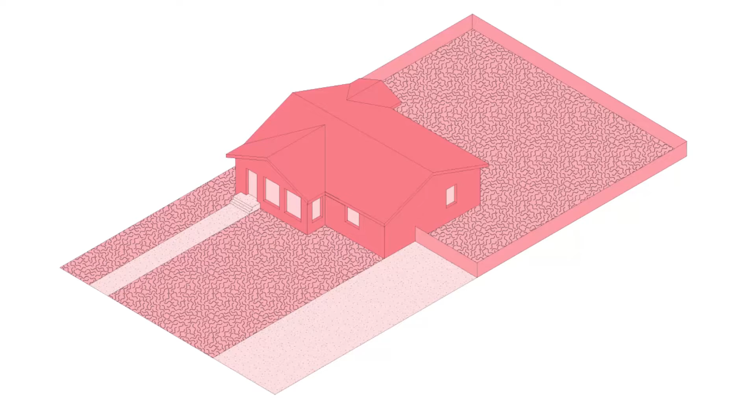California is in the midst of a severe housing shortage. Southern California alone has an estimated housing deficit of 800,000 units. To address this, California's legislature passed State Assembly Bill 68, which allows all single-family residences to add accessory dwelling units, known as ADUs, to the property. These units typically reside in the rear of the lot and can be as large as 1,200 square feet. With this additional dwelling, the backyard is transformed from private domain to semi-public shared space.

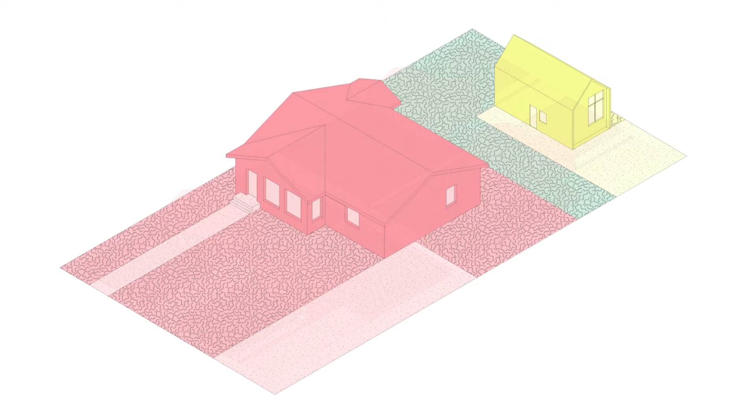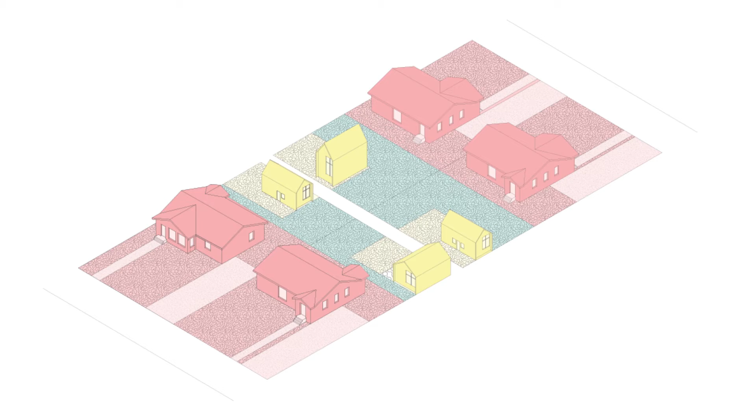Integral to our design approach is an understanding of a typical suburban community in Los Angeles, where lots are adjacent to each other and often separated by a fence. Eschewing the age-old adage that good fences make good neighbors, we intend to tear down barriers and create micro-communities. The configuration of these communities can take many forms, with alternative layouts producing alternative sorts of social interaction.

Guiding these micro-communities is the idea of participatory ownership, wherein maintaining the semi-public shared space rests on both homeowners and tenants. Pool House reaches out to homeowners and offers to build them a secondary unit, putting up all the cost and handling the architecture, construction, and leasing. In return, Pool House receives a 10-year lease on the ADU, allowing it to sublet the unit for a profit. During that lease, Pool House makes monthly payments to homeowners for 10% of collected revenue. At the end of the 10-year lease, the homeowner keeps the secondary unit and can choose whether to retain Pool House as a property manager.

Reimagining the typical Los Angeles housing block.

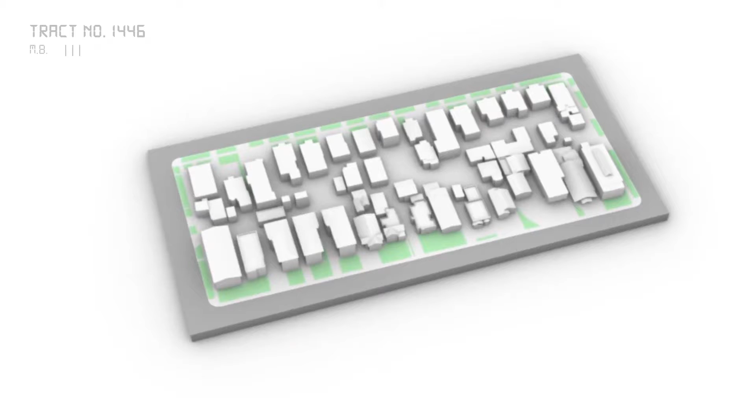Los Angeles, for all of its architectural variety, still retains certain uniform qualities—notably, the city block. In West Adams, the typical block is comprised of an array of homes that abut one another on the sides and rear of the lot, otherwise separated by a two-way road. Tract 1446 is one such typical block, and will serve as the basis for the forthcoming speculation and proposal.

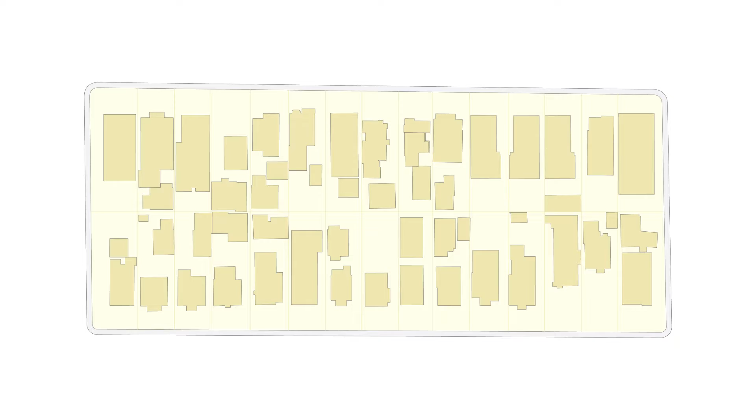By overlaying the building code distilled by Assembly Bill 68, we can begin to understand the potential for the individual lot, clusters of lots, and the block at large. We start by identifying the existing non-primary structures, mostly detached garages constructed in the 1950s. Imagining a clean slate, we apply an ADU setback analysis of 10 feet from any existing structures and 4 feet from the sides and rear of the lot, yielding 27,000 square feet of developable land and an additional 29,000 square feet devoted to a new public thoroughfare.

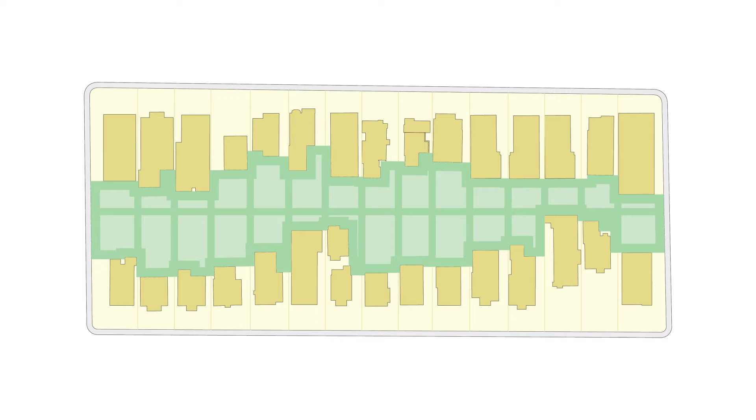The result is the inversion of the typical city block, such that community life is centered along what had been the rear of the lot.

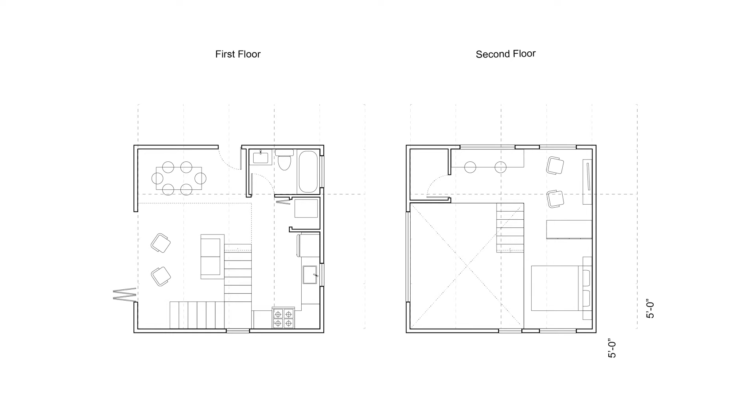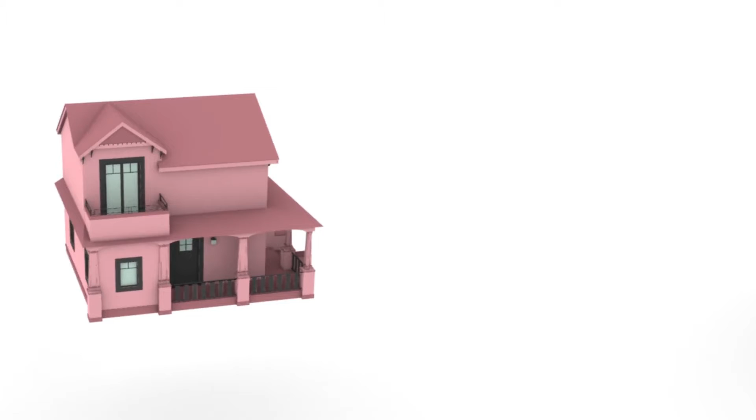Conscious of Los Angeles' eclectic housing aesthetics, this proposal studies and reinterprets many of the city's iconic styles, modified for affordability and rapid production. Along with 5 unique floor plans, ranging from 1-bed, 1-bath single units to 2-bed, 1-bath adjoined townhouses, this proposal reimagines 5 specific styles: International, Craftsman, Storybook, Colonial,

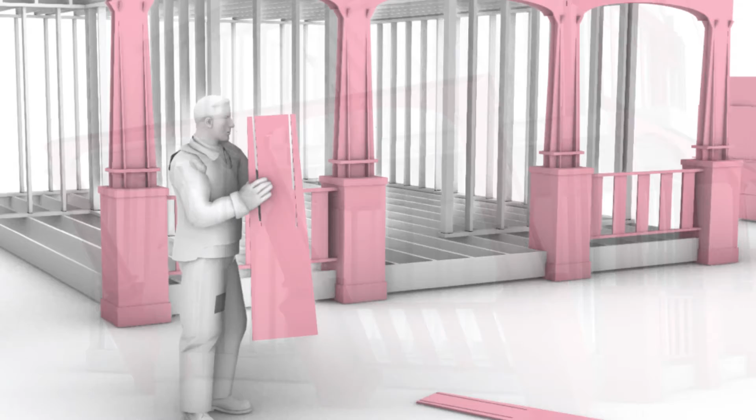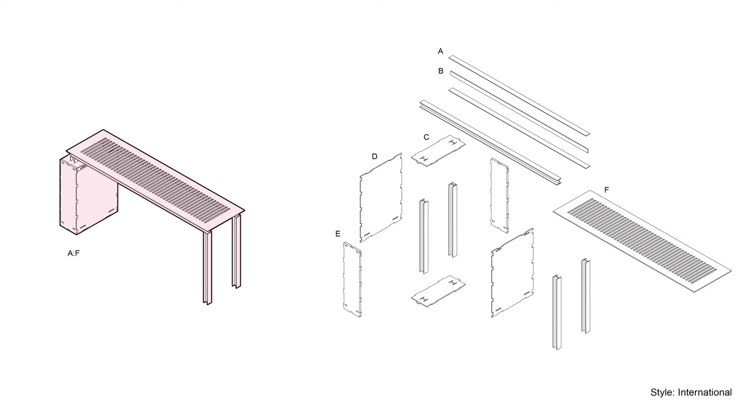and Spanish Revival. A specific element from each housing style is adapted to be generated from standard structural plywood that can be rapidly produced using CNC technology. Since these elements are formed from 2-dimensional cut paths and joined by interlocking slots, the result is not a one-to-one replication of existing styles, but an approximation that signals the past while broadcasting the future—embracing a new sort of pixelated historicism.

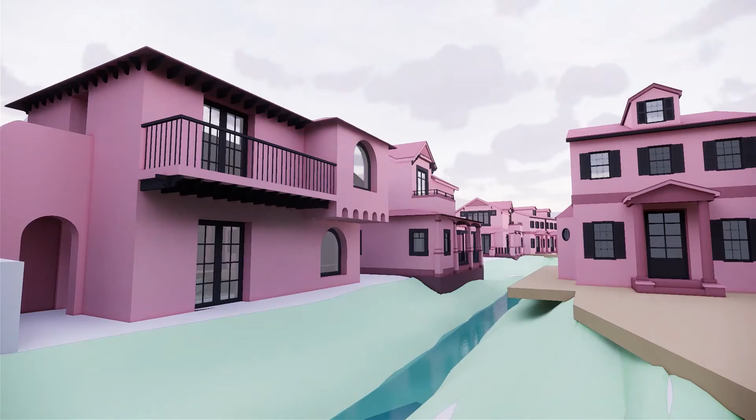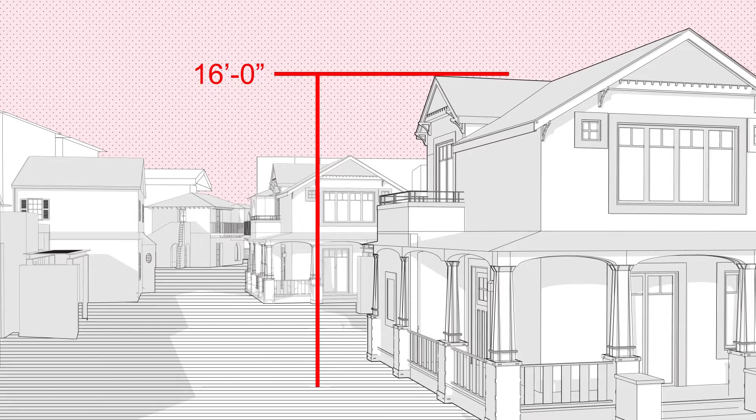With the statutory height limit of 16 feet for 2 or more units on a lot, our strategy deploys elevational changes to provide adequate overhead space on each floor. By creating a 4-foot depression in the ground, we subvert the height limit to allow for comfortable 20-foot, 2-story dwellings.

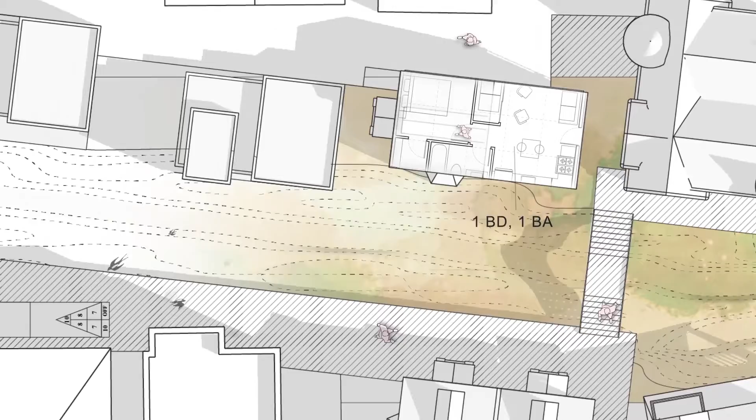Additionally, we leverage this depression in the ground as part of a larger landscape and irrigation scheme that tethers together these otherwise discrete units. The elevation change is treated as a native plant rain garden, a natural means of removing pollutants from rain runoff and providing new habitat for local flora and fauna.

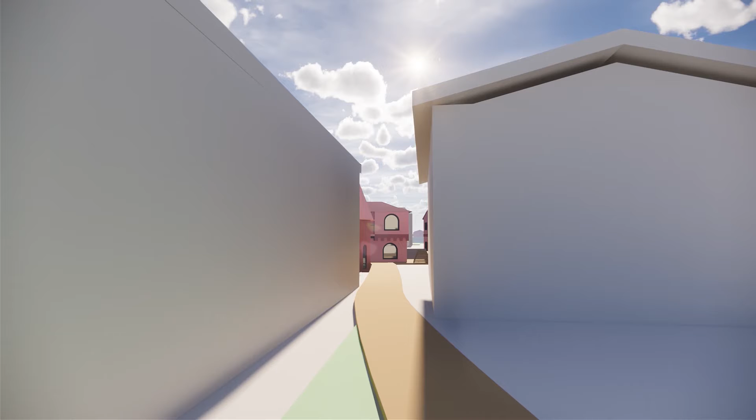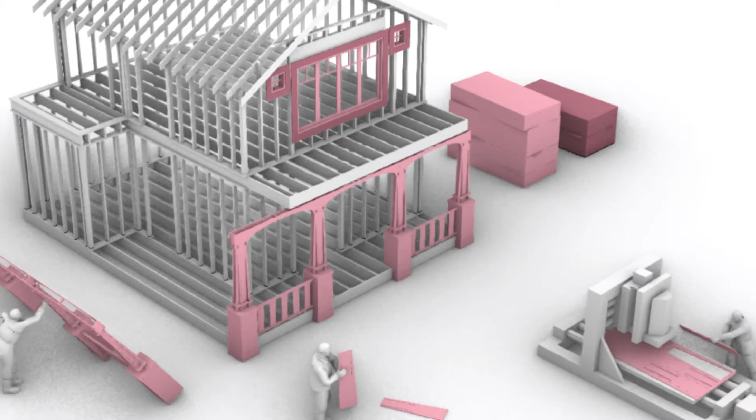The result of these actions is the production of a new community paradigm nestled within an old one. New housing stock gives way to more affordable prices, and smaller units facilitate the integration of different socioeconomic backgrounds. Rapid prototyping brings construction costs down while preserving the character of Los Angeles.

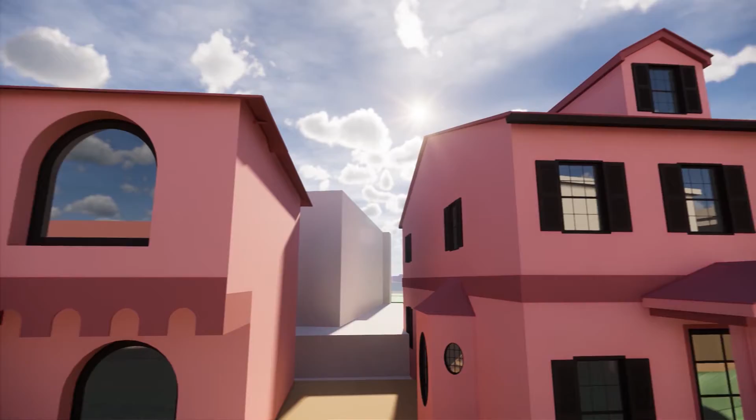In conjunction, these speculations collide to produce a more equitable and sustainable vision of LA, achievable within every typical housing block.

Pool House, the Catalog 2020. The catalog creates a product for living. The catalog addresses the pool house block, yard, alley, house, and components.

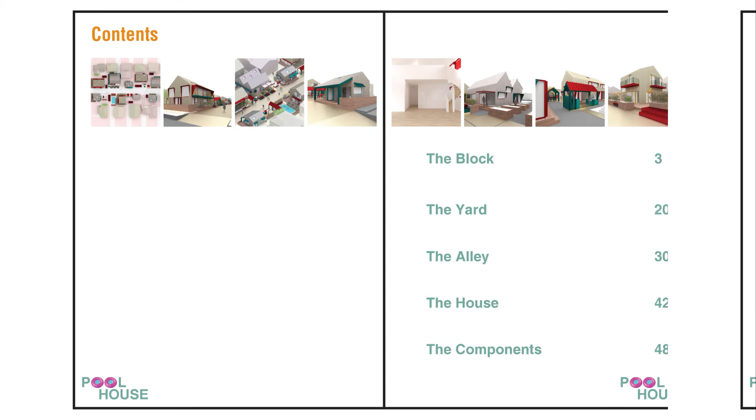The back house aims to address an increasing idea surrounding the live-work house. The Pool House catalog leverages architectural components to produce dynamic interaction between front and back houses throughout the neighborhood. Through participatory ownership, Pool House will facilitate a system of micro-landscapes to support this community of live-work housing.

The Block. Located in the southwest corner of West Adams, the block is near the Expo line. This investigation examines the city block with an alley.

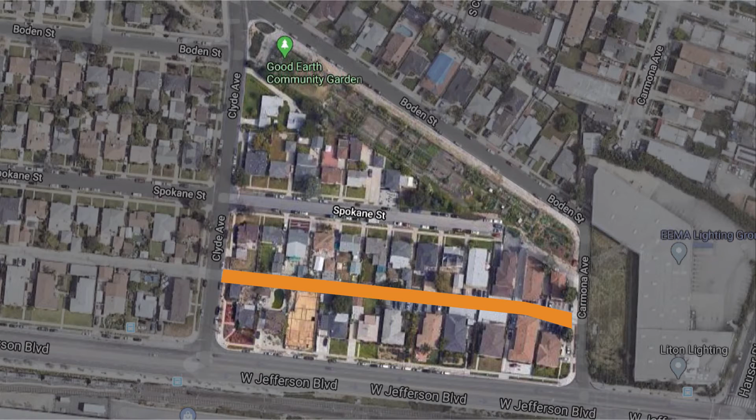Pool House will start as one house and phase into a network of backyard communal spaces that superimpose a grid of houses along the alley, creating a new frontage of pedestrian movement. The project works on two scales simultaneously, a city scale and a domestic scale.

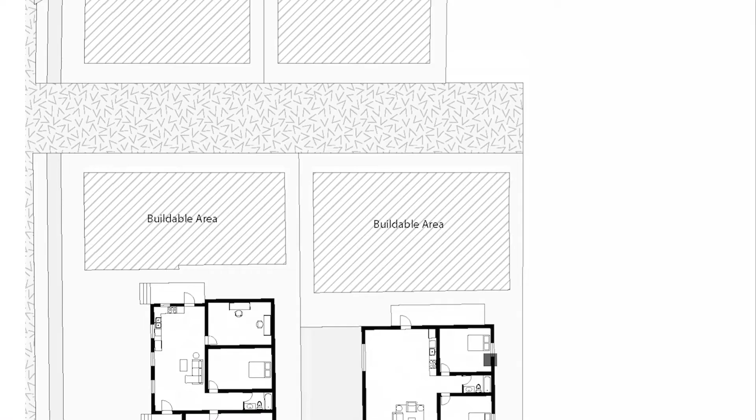The alley is activated by utilizing the 4-foot setback as parklets. Pool House sets up a network of micro-landscapes to create a harmonious relationship between neighbors.

The Pool House yard and alley break shared outdoor spaces into components. This will continue the grid into the yard, creating a system of connected back and front houses.

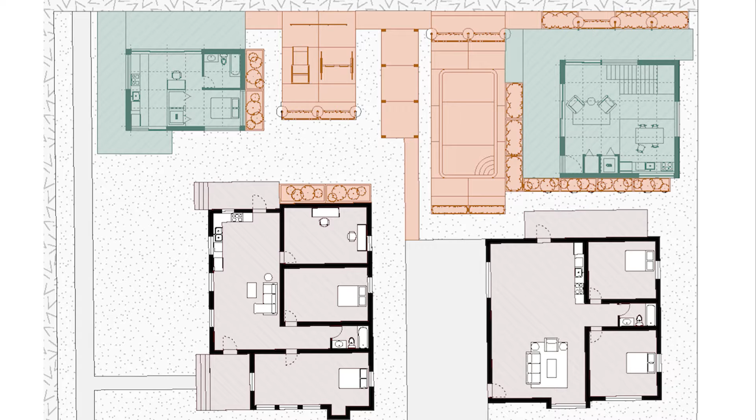Pool House, aiding in the transformation, will work with the city and the neighborhood to schedule times for garbage, delivery, and community events that these new civic spaces have the capacity to explore.

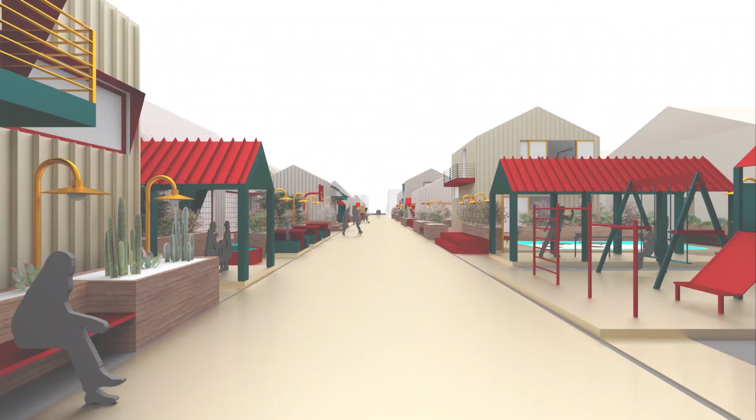Now that the system of micro-landscapes is structured along the alley, the new Pool House houses will be able to plug into a system within the community at large.

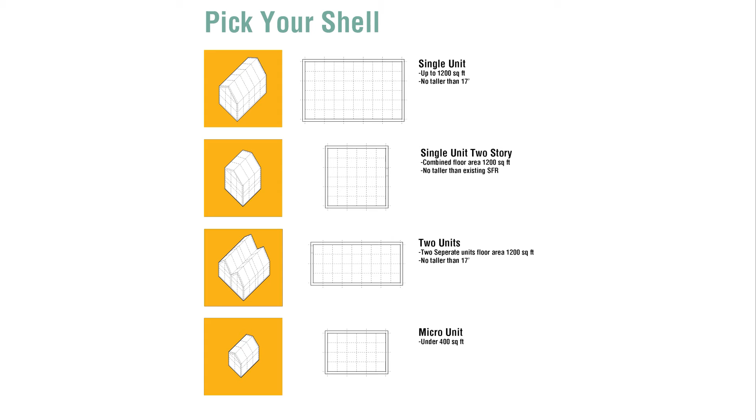The Pool House house. There are 4 housing typologies: the single unit 2-story, the 2-unit, and the micro unit, each with its own limitation of space, creating 4 different shells.

The single-family resident owner will choose the shell they want to componentize and work with Pool House to design the house to fit within the network.

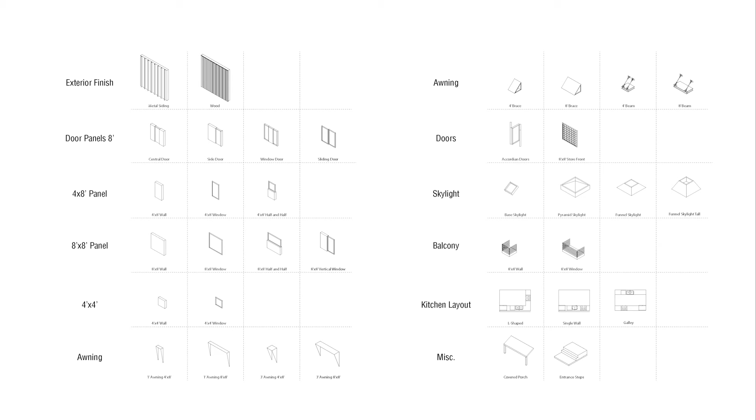The house can be broken into 4x8 and 8x8 components, atomizing the house into interchangeable architectural elements. The components respond to the plan division, resulting in different arrangements of windows, doors, and other accessories.

As the COVID-19 pandemic has drastically altered our current living and working environments, it has also pushed us to pursue what it means to both work and live in the same space.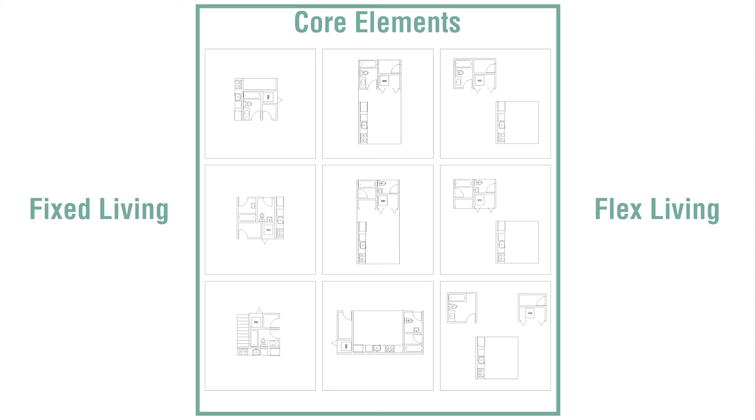The space of the house can be divided into the core, which includes bathroom, kitchen, laundry, and storage, and fixed living including bedrooms and private offices, and flexible living containing living room, dining, office, and work.

Within each unit, the core can shift to allow for a separation between live and work, or can be used to separate flexible and fixed living.

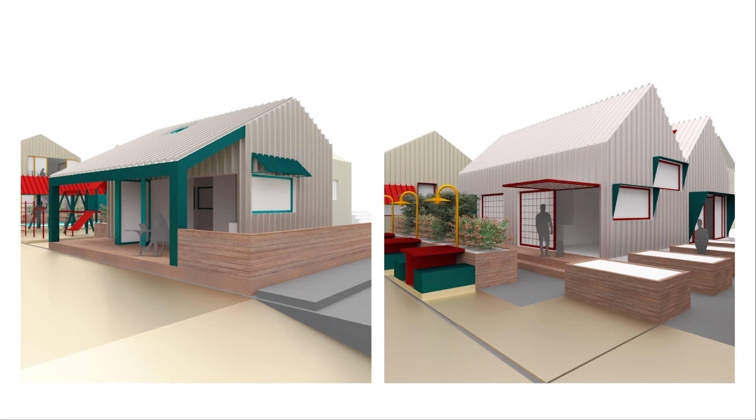2-story or lofted spaces allow for the first floor to be fixed living and the second floor to be flexible living, or vice versa. Each unit is designed keeping in mind the potential of indoor-outdoor living.

The back house acts not only as a space for prospective tenants to rent, but also is flexible enough for that tenant to both live and work.

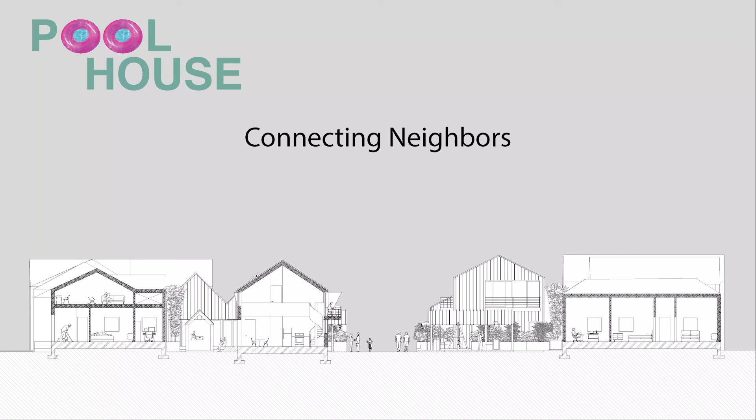Through the communal amenity yard and civic components, Pool House is creating a network within the community to help each other thrive both at home and for leisure, as well as professionally and at the office.